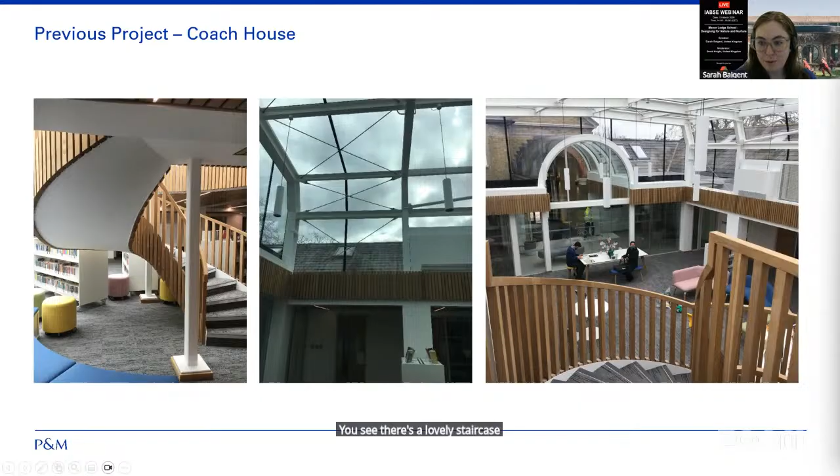It didn't have any specific M&E, so it was fully reliant on natural ventilation. So the windows and doors had to be open even in the colder months if it was in use. It's long and narrow, so restricted play area and could only be used by one group at a time. Despite it being fully glazed, it actually didn't really bring a lot of light into the existing classrooms. No storage, and there's no really feeling of link between the inside and the outside. It's just a small conservatory.

The existing playground was also fully paved and largely uninspiring to the kids. Uneven paving surface, and it was directly against that kind of indoor-outdoor external play that they were really keen on in the school. So that was going to be formed part of the works as well.

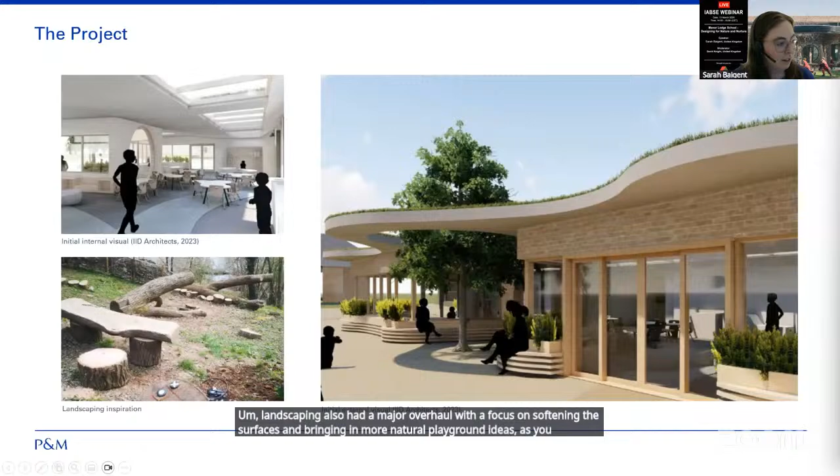This was part of a broader program of work, so this was phase 2 of a 5-phase plan.

The key element was the early years extension. Other works involved new openings to improve circulation and the feel of the spaces inside, because it's a lot of corridors and rooms. There was also an infill to an unused staircase and some minor demo works, the aim was to propose a new refreshed staff area.

I'm not really going to focus on those because they weren't as interesting structurally, but I'm told the spaces were really nice and the staff are very happy with them.

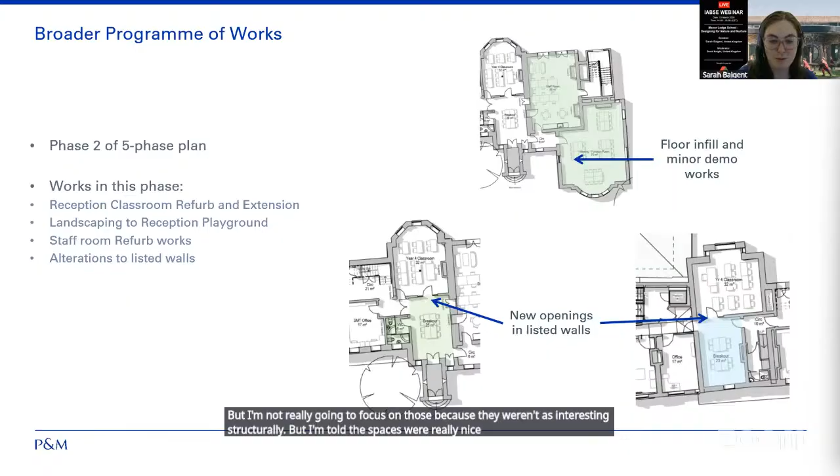We had some archive information on the existing structure of the conservatory, including sketches and the calculation pack associated with them. But as usual, there were no final stamped construction drawings, so we knew we couldn't really rely on these to be true, but it gave us a bit of a starting point. We weren't going to be able to confirm any assumptions until the contractor got to site.

So really the only thing we were proposing to reuse would be the foundations, since the whole conservatory was going to be demolished. This gave us a good idea of at least the depth they would be and what we might expect to find.

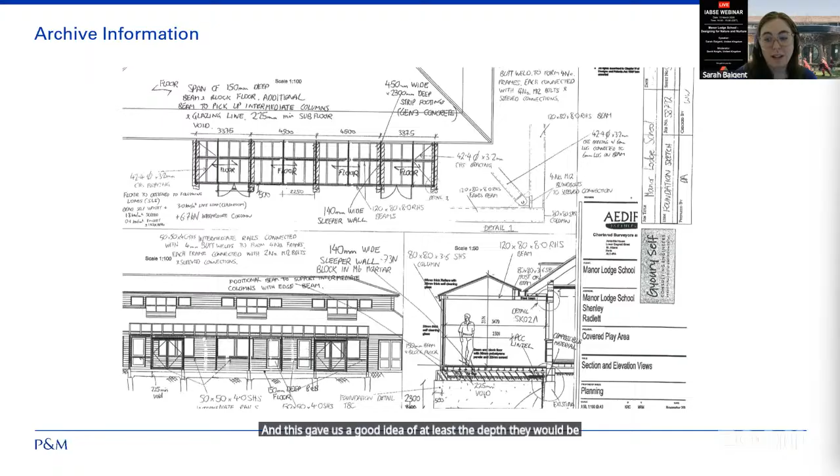The ground conditions were pretty poor. We had around 1 meter average of made ground, which varied a bit more or less in certain areas, and there was soft clay directly beneath this, which gradually increased in stiffness. Coupled with the clay, the site being nature forward had trees left, right and centre. Very happily for us, directly adjacent to our proposed building was a rather large collection of oak trees, which is never very good if you're doing foundations in clay.

All this to say, we knew we'd need deep foundations. Being a single-story building, foundations are usually 30 to 40% of the embodied carbon, and deep ones would only increase that further, so we definitely wanted to look at reusing those existing foundations where possible.

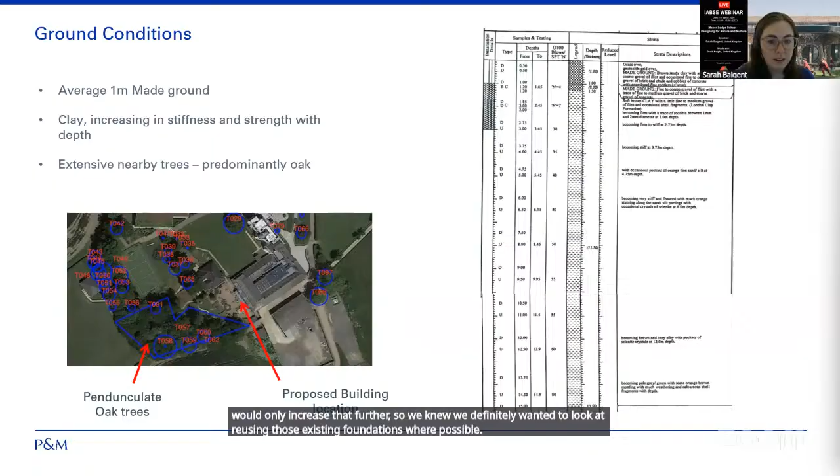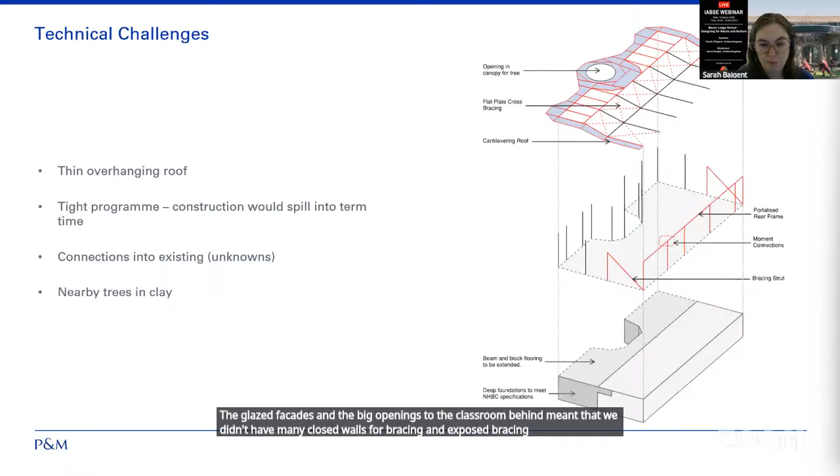The project, though small, had some fun technical challenges. Both us and IID had the aspiration to use timber where possible, but the cantilevering overhanging roof was going to make that quite difficult if they wanted it really thin and slicing through the air. The glazed facades and big openings to the classroom behind meant we didn't have many closed walls for bracing, and exposed bracing through the windows wasn't really possible. So moment connections were going to be required, some kind of portalized frame, and in timber those moment connections would drive up the size even more, so we ended up using a combination of steel and timber in the frame.

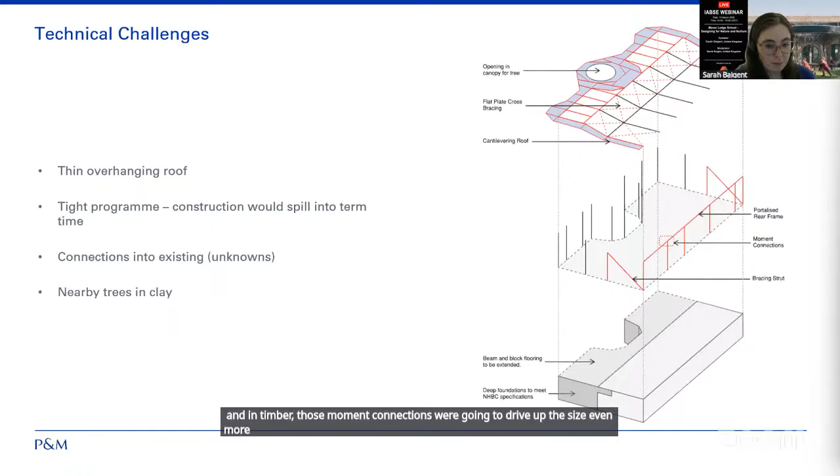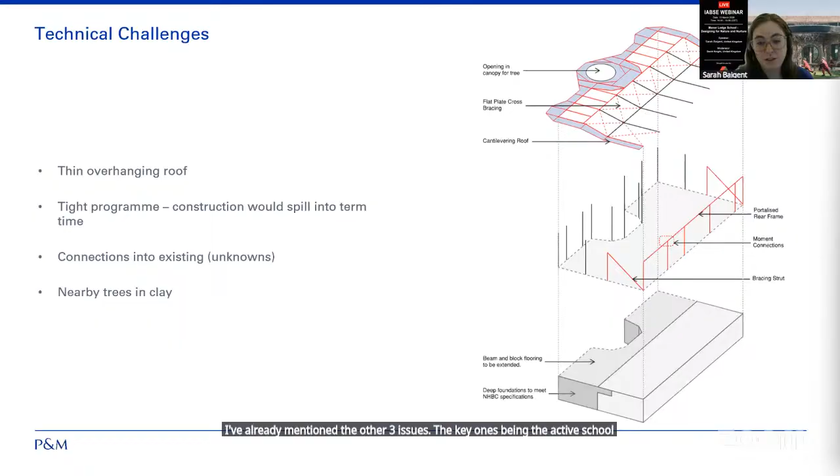I've already mentioned the other issues, the key ones being the active school site and the deep foundations required to meet NHBC standards for building in shrinkable soils. So we'll look at how we tackled those.

One of the key things we were keen on was embedding low carbon thinking in the project from an early stage. It's very easy to lock yourself out of potential savings later by committing to headrooms, head heights and external envelopes before you've really studied the depth required for the lower carbon solutions.

In this case, we were looking at three options: steel, flitch, and fully timber. We worked with the architect to see where we could set deeper structural areas and allow for these more sustainable beams. Interestingly, you might note there's not that much saving between the steel beam and the flitch option, but it did allow for a slight saving.

Every little helps, and it also helped give that sort of warmer, natural interior while still allowing the structure to be exposed. So you do get savings in finishes and the ceiling, etc., which aren't really captured in that structural note. We also designed the foundation scheme to reuse the existing deep foundations, helping reduce our impact further.

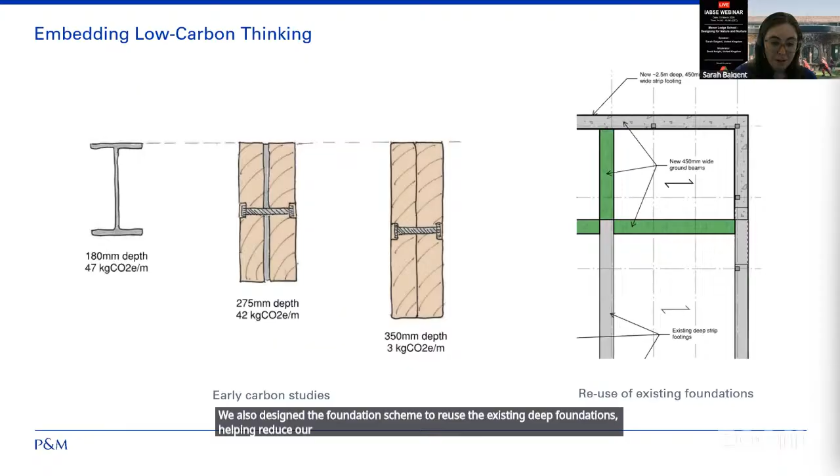There's a lot of funky angles and levels to work with, so it took a lot of sketching and resketching from my end to work out how all the pieces would fit together. We then worked these through with the architects to discuss how exactly we wanted those exposed connections to look and how this interacted with the proposed details.

Workshops like this were really valuable and helped us work as a team to solve the solutions rather than individually trying to piece our elements together.

You can tell these were quite early sketches because I was still writing in lowercase, and I've since adopted the engineer's capitals-only approach for all sketches. But these are quite nice, I thought.

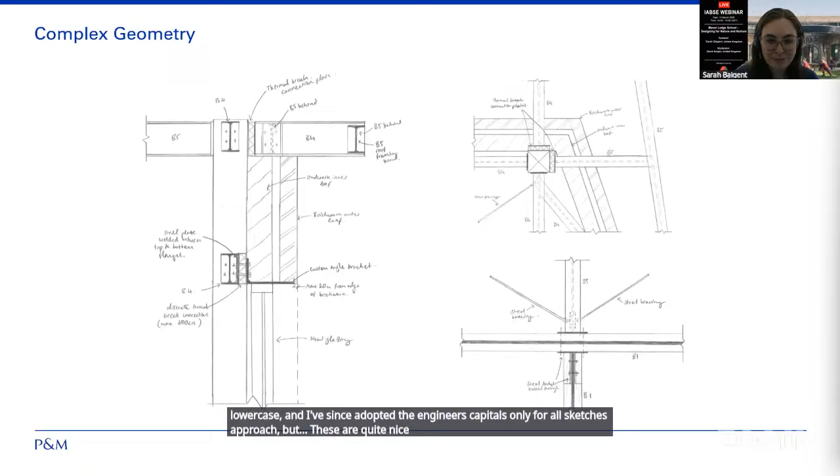This was one of the first jobs on site where I'd done the full scheme from stage 2 to stage 4, and it was really exciting to watch it all go up. Seeing how my hand sketches and our formal drawings translated to a physical structure is something I've always found really rewarding.

It was also, I suppose, a nice day to visit site. It's slightly less fun when it's slashing with rain and you're trying to convince the contractor you can see all you need to see from under shelter. Then it takes you about 2 weeks to clean the clay off your boots. But yeah, it looked really nice - Lifebuoy had a nice site put together.

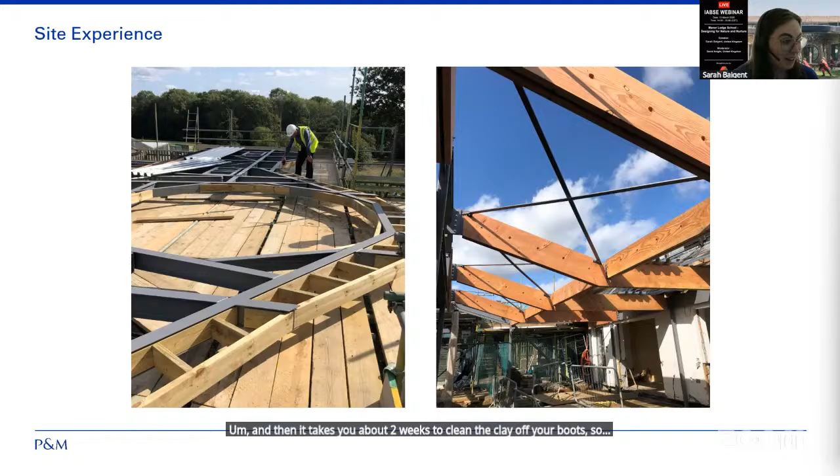As with any job working with existing buildings, we had some interesting site discoveries. One of which was that the existing foundations were actually brick and not mass concrete, and also that the beam and block was spanning a completely different way to what we expected it to.

This was one of those moments where you have to be ready on site, and I walked to a corner, sketched something, sent a picture to the associate I was working with, and gave him a call. And he said, 'Yep, sounds good.' Contractor took a photo, and they built it within about 3 days, which was kind of scary but quite exciting.

The openings in the main house also gave us a bit of fun, since it was brick infill stud work rather than full brick. So we had to slightly adjust where the opening was and how we tied into the existing wall.

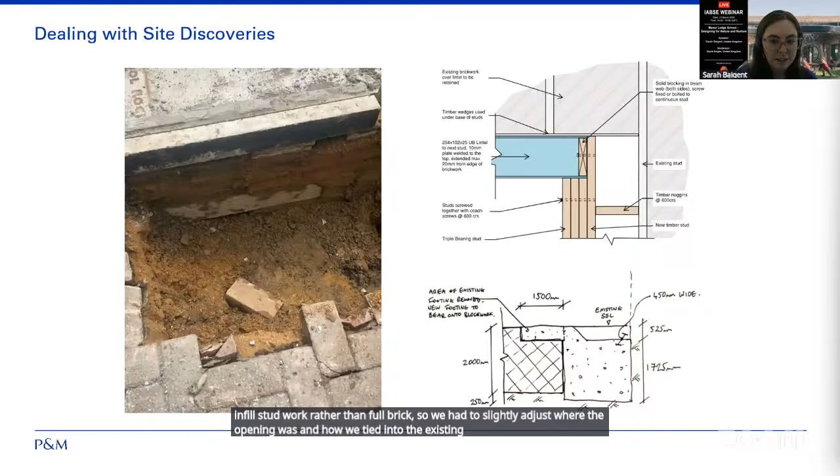Since the journey to site was quite long, I often found myself invited to look at other defects across the site. One of them was relatively simple, a bunch of lintel cracks at roof level and confirmation from the school that no one in memory had ever serviced the waterproofing to the roof or the gutters. So that was a relatively easy fix.

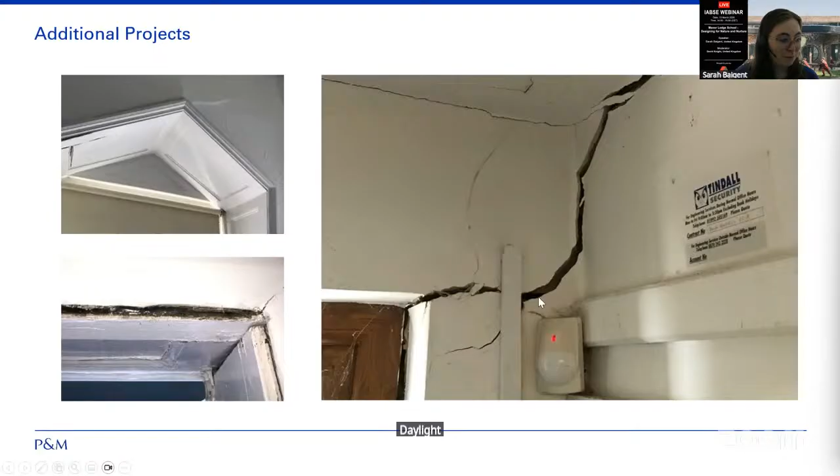One was a bit more intensive, like the massive crack in the outer wall of the nursery, which you can see here. Daylight was pretty easily visible through that crack. This is just inside one of the cupboards. Again, pretty nice day for a site visit.

I was asked to look at some cracks to this nursery. You can see slightly here, there's a small one there, and a bigger one that comes around this corner here. So the first picture was from the inside of that cupboard.

Initial thoughts were that this was some kind of foundation movement, since the corner appeared to be rotating round. And as we know, it's pretty rubbish ground, and there's trees - an oak tree just to the left here, and a relatively new fruit tree just here. Archive drawings showed that this conservatory was built on piles, but nothing was underpinned or changed.

So we said, we suspect it's shallow brick footings, and you'll probably need to do some underpinning, and specified some remedial works for here. And the trial pits showed us that we were correct - it was pretty shallow foundations, and so our underpinning specifications were fine.

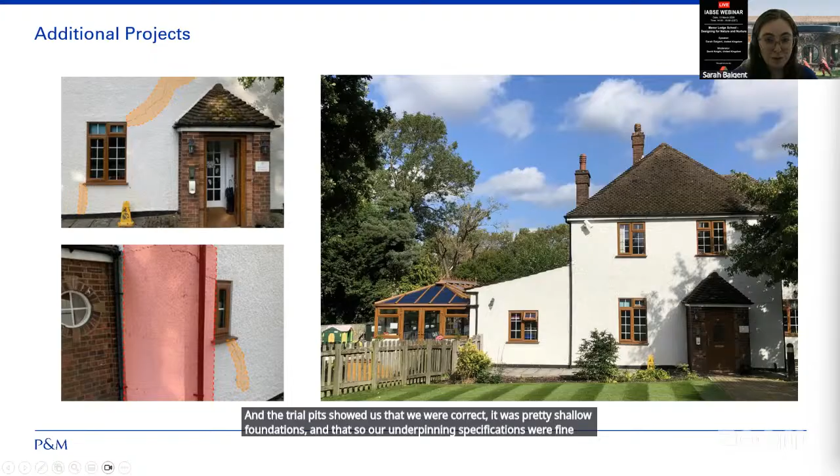But they also showed us something new, which was we found a well directly next to the chimney of the building. And the contractor called me up and said, 'Found a well. What do we do?' It wasn't in use, so it was fine.

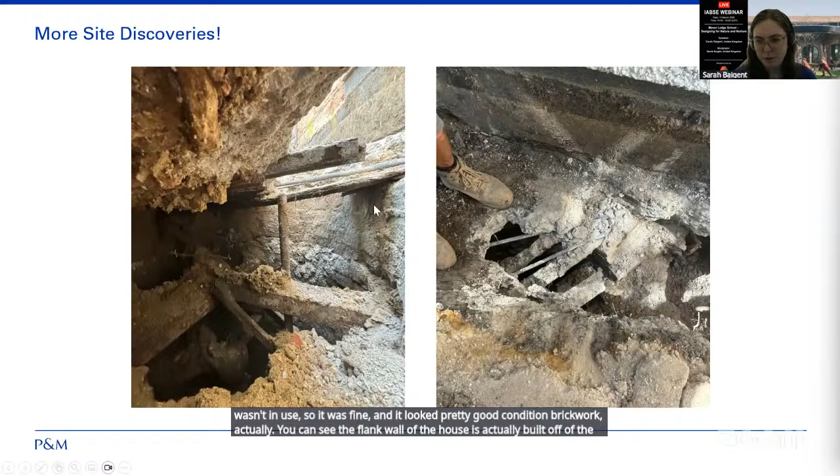And it looked pretty good condition brickwork, actually. You can see the flank wall of the house is actually built off of the well. So we're not entirely sure what happened there, but we ended up just bridging over it. So it's still there.

Anyway, this project taught me a lot of key lessons. The first is that there's no such thing as over specifying when it comes to timber, particularly when you've got exposed timber connections. Although the architects and I knew exactly what we wanted the connections to look like, we really didn't give enough detail in the tender specifications for it to be captured fully by the contractors. And that's something that I've very much learned from, and I do a lot of timber buildings now, and I know specification is key.

A very real lesson, as with all existing buildings, is that record drawings can't be fully relied on. Thankfully, there wasn't really anything deal breaking on this project, but it's always good to have a reminder. And then also, time is precious on site. Things move very quickly, and you have to be agile and come up with workable solutions with the contractor as soon as possible, really. But at the end of the day, teamwork is key, not to be kitsch. Every building is the result of teamwork amongst all disciplines.

We had a lot of workshops, we did a lot of sketching, and the key thing was communicating the why and the why not about all decisions, not just to the design team, but to the client. It led to a lot more productive and creative discussions around potential solutions, rather than just having a hard line and not really opening up the floor.

Having these discussions on site in the head teacher's office over what was quite an excellent breakfast spread every time by the caterers really helped make it a fun project to be on, not just because of the food.

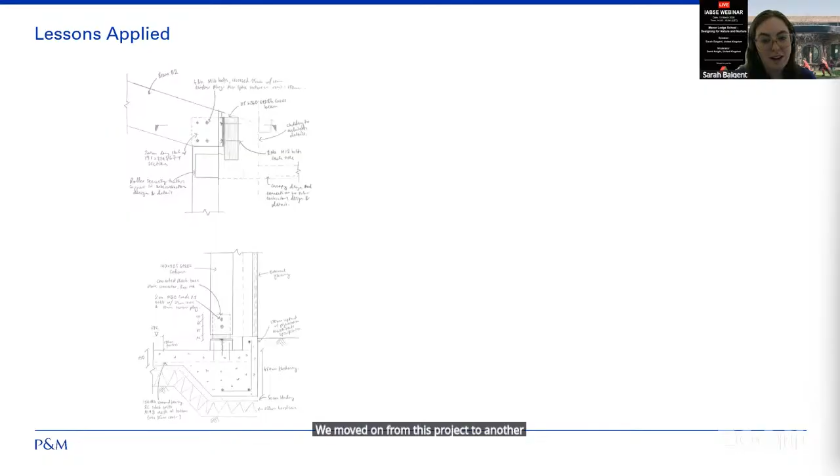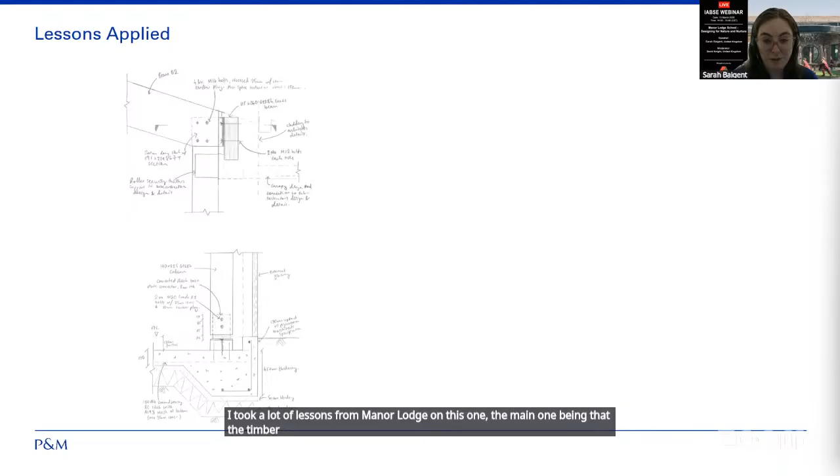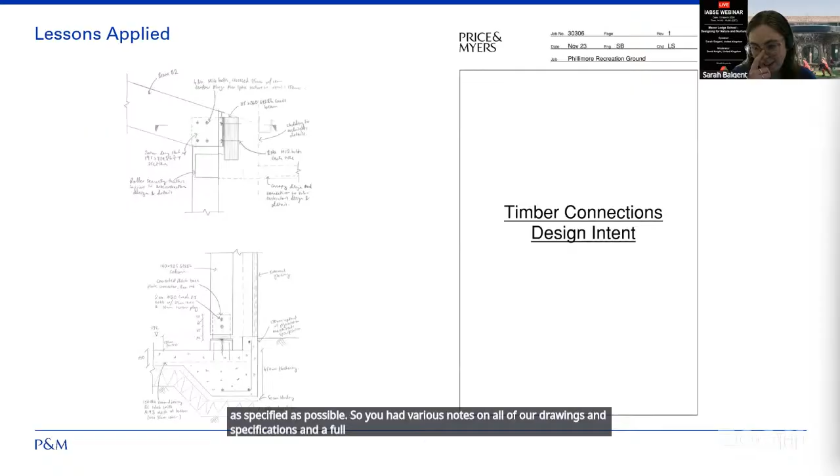We moved on from this project to another project with IID and with the same contractor, Life Build, at Phillimore Recreation Ground. I took a lot of lessons from Manor Lodge on this one, the main one being that the timber connections were to be specified as far as possible. So we had various notes on all of our drawings and specifications and a full package of design intent, which carried through, and this really worked.

We're very happy with the outcome. Once again, this was photographed by Andy Stagg, who did all the Manor Lodge photos.

Being a job for the council, it was really important that it came in on budget and on time, and all of this extra work from both the architect and us on all of this upfront specification, and going to the tender interviews and making sure they were aware of all this additional work, meant it did come in on time and pretty much on budget. So very happy with that.

One interesting thing on this job, which also had a lot of clay and a lot of trees, was that we had this package of remedial works about 2 years prior to getting on site where they removed a bunch of the trees. Since it was low shrinkable soil, we could discount all of the additional depth that you usually have for being in the footprint of a removed tree and just go with the minimum, which saved loads of depth in our concrete and strip footings and overall carbon.

So that was a nice happy story. I've kind of whizzed through - I thought I might speak a bit slower. But like I said, it's quite a small project, and it was really nice to get into the details of it and talk about it a bit more in the essay for the Nethercot.

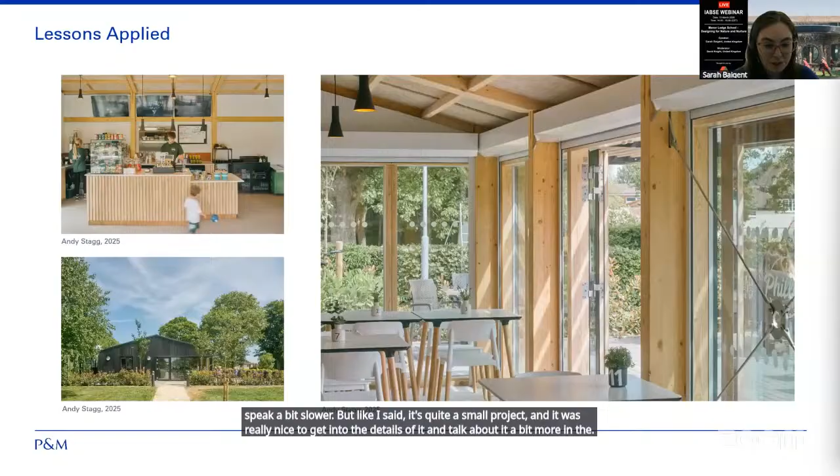So I suppose I'll open up to questions. Thank you very much, Sarah.

It's really lovely to see the passion you have for the project. If anyone has any questions, please do put them in the webinar chat and we will read them out, or in the Q&A section as well. There's nothing currently, but please do add anything in there.

Just to kick us off, Sarah, one of the things that came through in your submission was the passion you had for collaboration and collaborative approaches to solving any issues that came up on site. You talked briefly about that in lessons learned, but how do you take that development of a collaborative approach and the development of a team across contractual boundaries into other projects? What are the main things you would suggest in the future with perhaps other contractors that you haven't worked with before, or other clients?

Well, I think it's important, with what we found, that they're not trying to undercut you. Often contractors are pushed by the same things we are when it comes to fees, and making sure all contractors are providing the same fee and being judged in the same way. So with that timber specification, with anything you might have as a CDP element that's going to require more cost, more time, more program, making sure everyone's on the same page about what that is really has that openness, and neither of you are trying to sneak something in or change the job, and you're all working to the same job. I think that's a really important honesty to have across that tender period in particular.